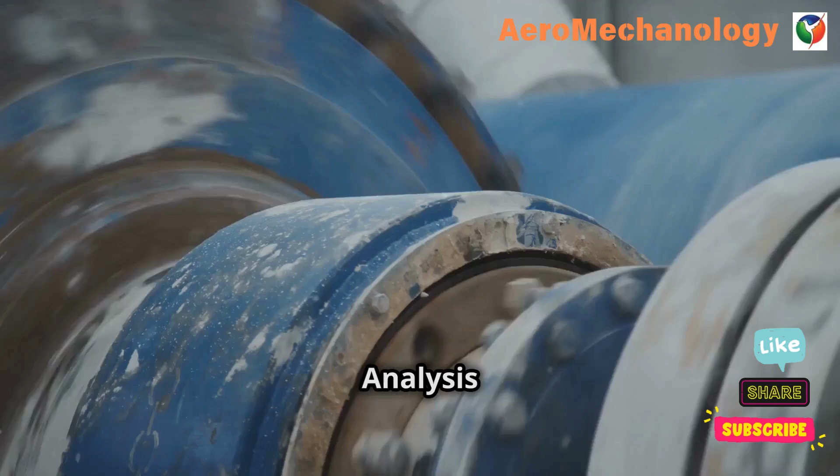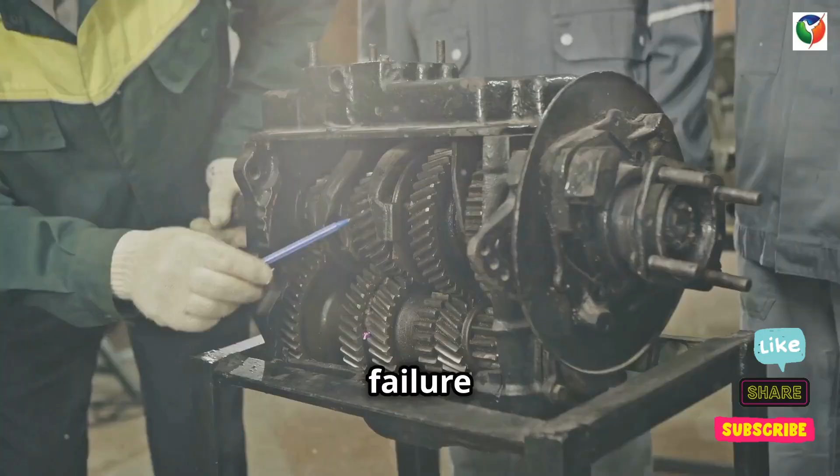Today's topic is fatigue analysis. Fatigue analysis is a critical process in mechanical engineering that evaluates how a material or structure will withstand cyclic loading over time, specifically predicting when failure might occur due to repeated stress or strain.

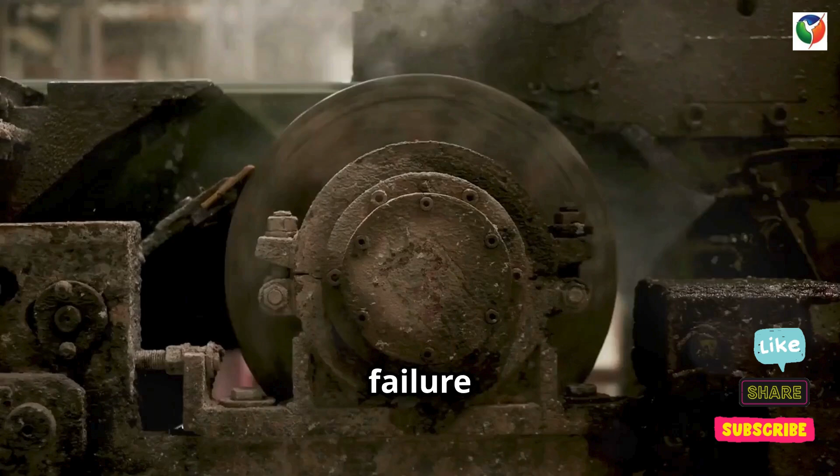Unlike static failure, which is caused by a single load event, fatigue failure happens gradually and can lead to catastrophic failure after many cycles of load, even if the loads are below the material's ultimate tensile strength.

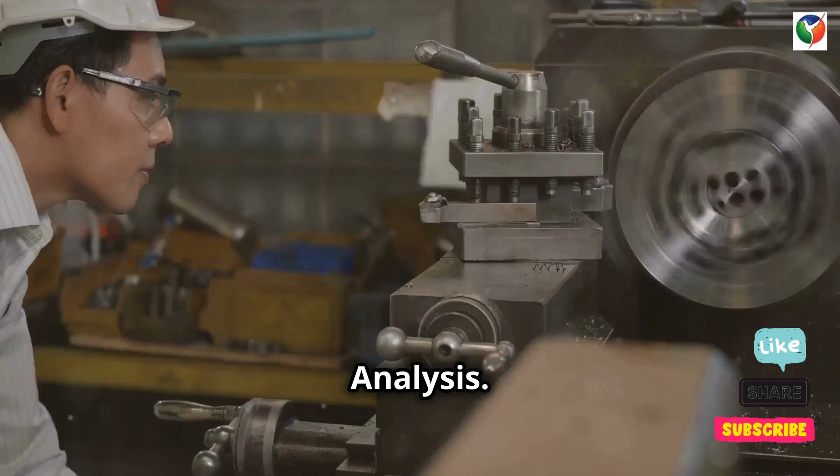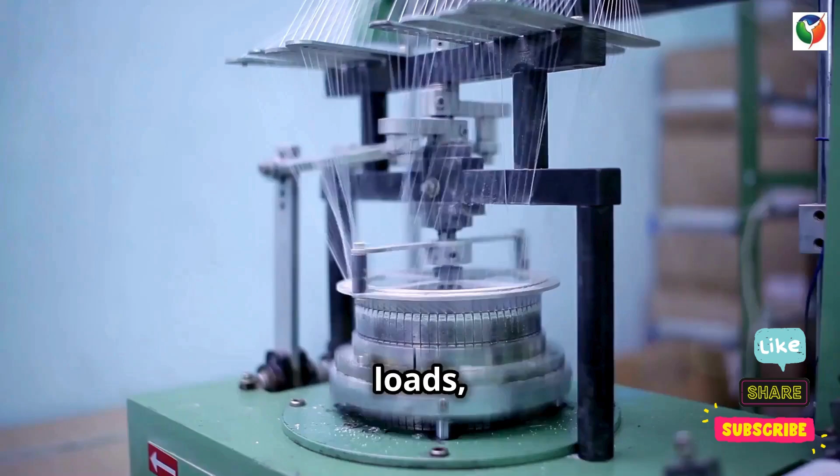Definition of fatigue analysis. Fatigue analysis aims to predict how long a material or component can endure fluctuating or cyclic loads, the number of cycles a material can handle before cracks start to form, and the conditions under which these cracks propagate and eventually cause failure.

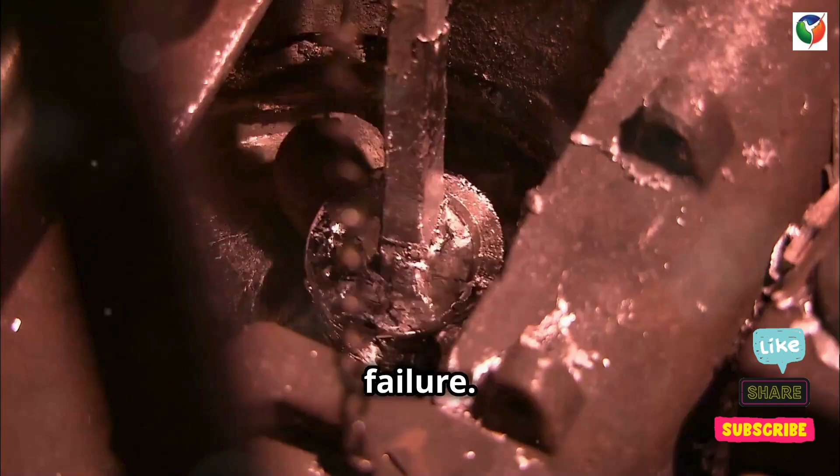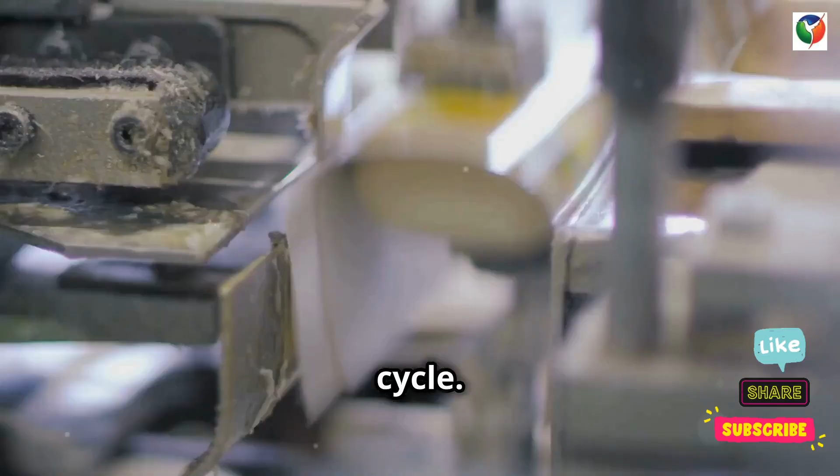Fatigue occurs in three primary stages. Crack initiation, where microcracks form at stress concentrations like notches, holes, or sharp edges. Crack propagation, where these small cracks grow with each load cycle. And finally, final failure, where the crack reaches a critical size, leading to sudden fracture.

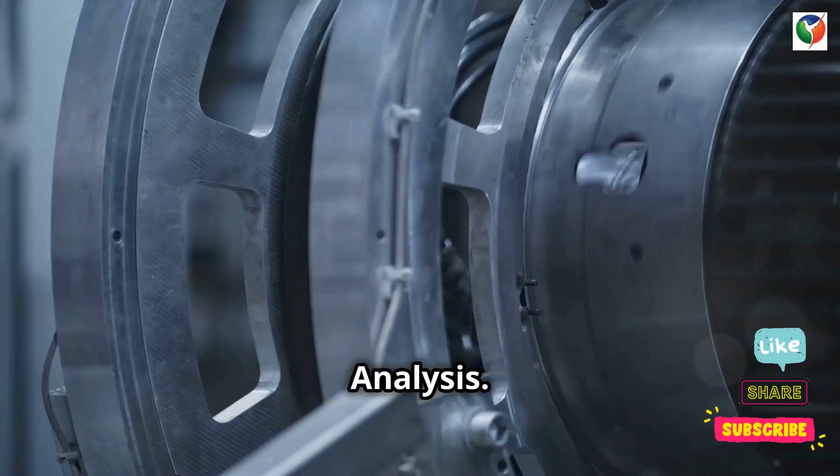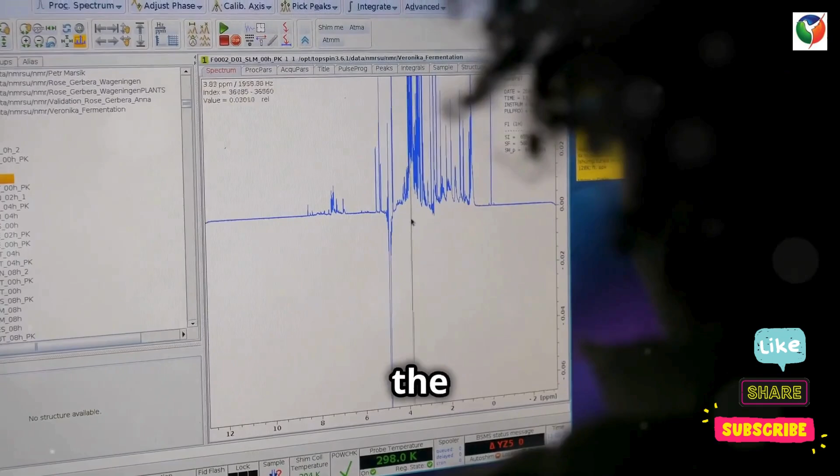Key concepts in fatigue analysis. Stress cycles are load fluctuations that occur over time, usually characterized by their amplitude, frequency, and mean stress. The S-N curve or Wöhler curve is a graph showing the relationship between stress, S, and the number of cycles to failure, N. Lower stress levels allow for more cycles before failure.

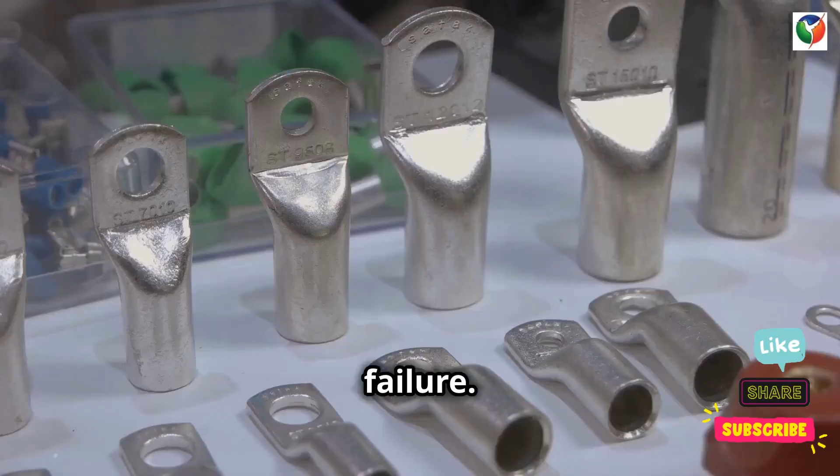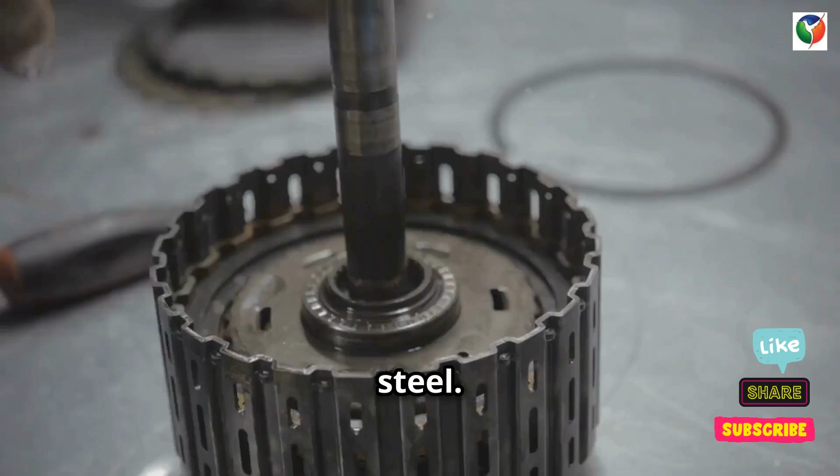The endurance limit is the stress level below which a material theoretically will not fail, regardless of the number of cycles, which is applicable for ferrous metals like steel. Lastly, the fatigue limit is the highest stress level a material can withstand for an infinite number of cycles without failure.

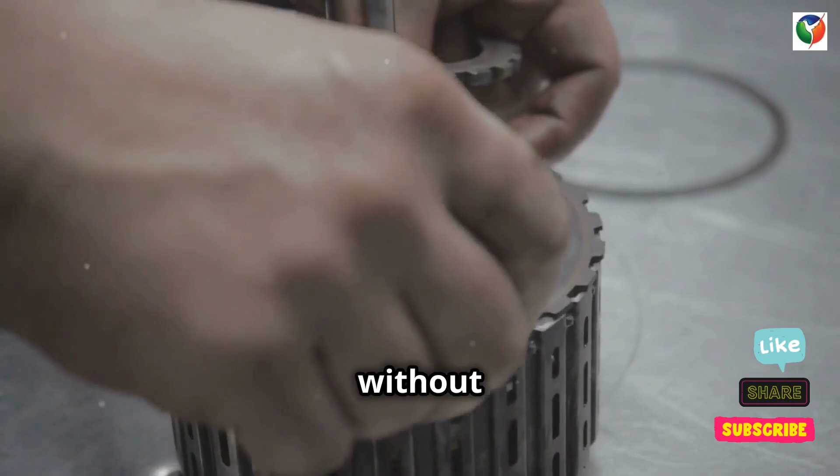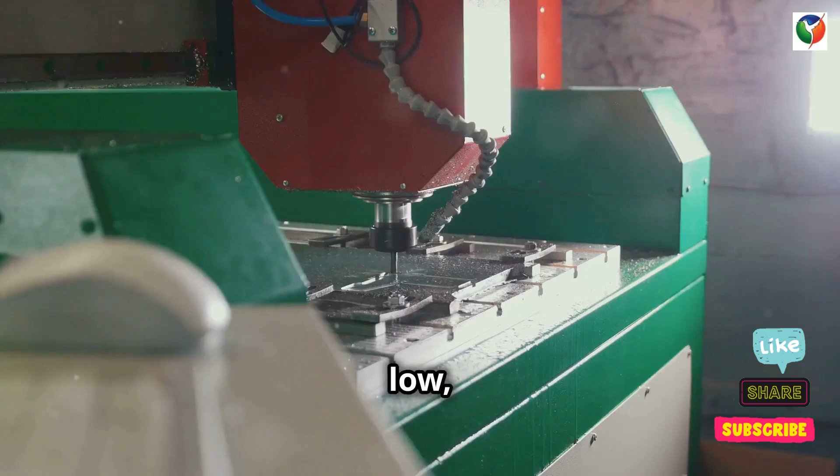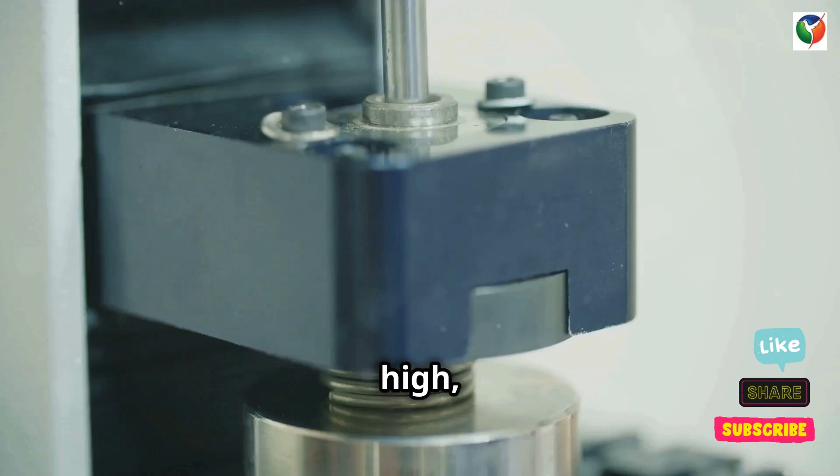Types of fatigue loading. High cycle fatigue, or HCF, occurs when the loads are low, but the number of cycles is very high, often reaching millions of cycles. On the other hand, low cycle fatigue, or LCF, happens when loads are high and the material undergoes plastic deformation, leading to failure in fewer cycles.

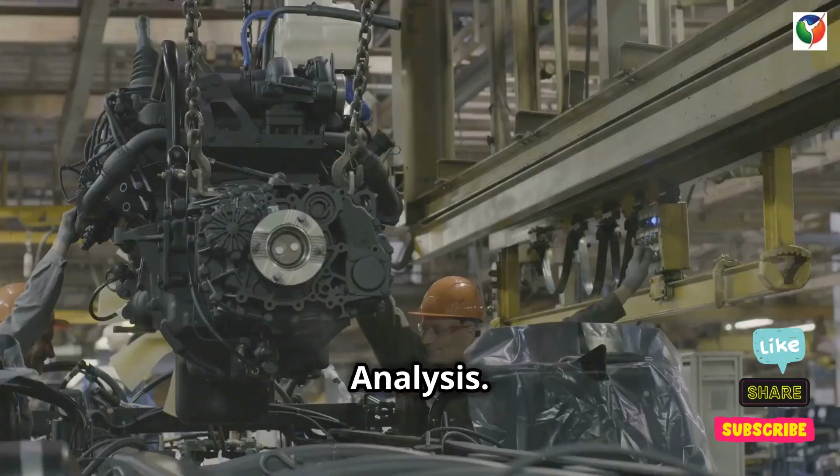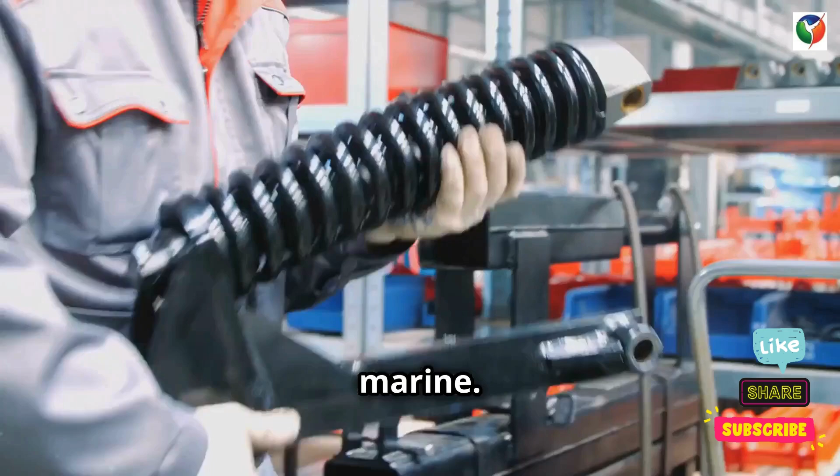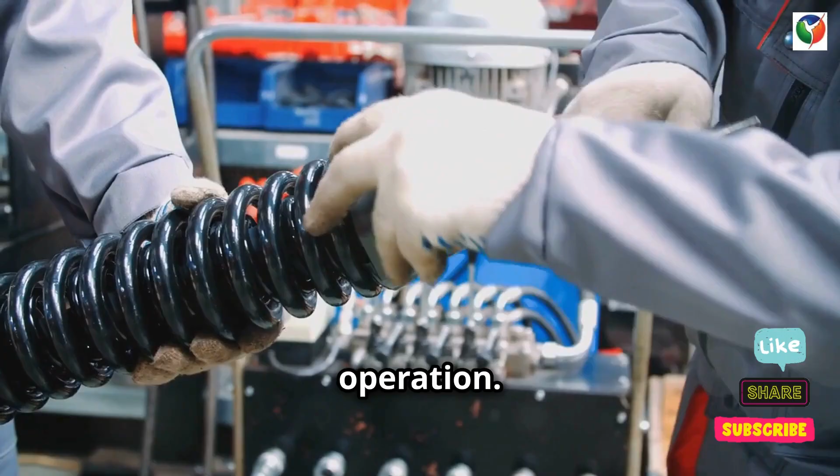Application of fatigue analysis. Fatigue analysis is crucial in industries where components are subjected to repetitive loading, including automotive, aerospace, civil engineering, and marine. In the automotive industry, parts like suspension systems, crankshafts, and engine components are subjected to repetitive stress during normal operation. In aerospace, aircraft wings, fuselage, and engine components undergo cyclic stresses due to changes in pressure and temperature during flight.

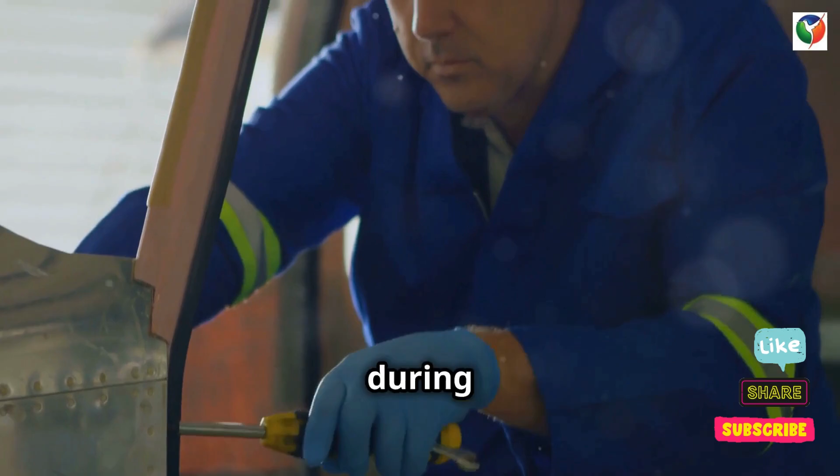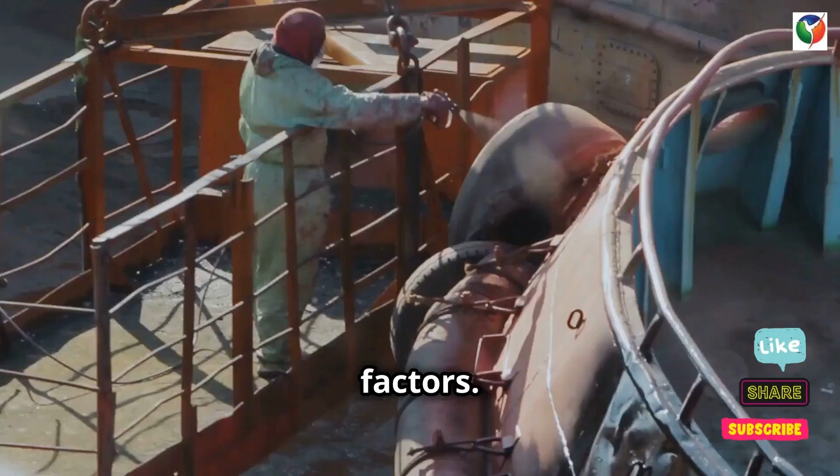Civil engineering structures, such as bridges, cranes, and buildings, experience fluctuating loads from vehicles, wind, or environmental factors. Lastly, in the marine industry, ship hulls and offshore structures, like oil rigs, face cyclic loads from waves and operational conditions.

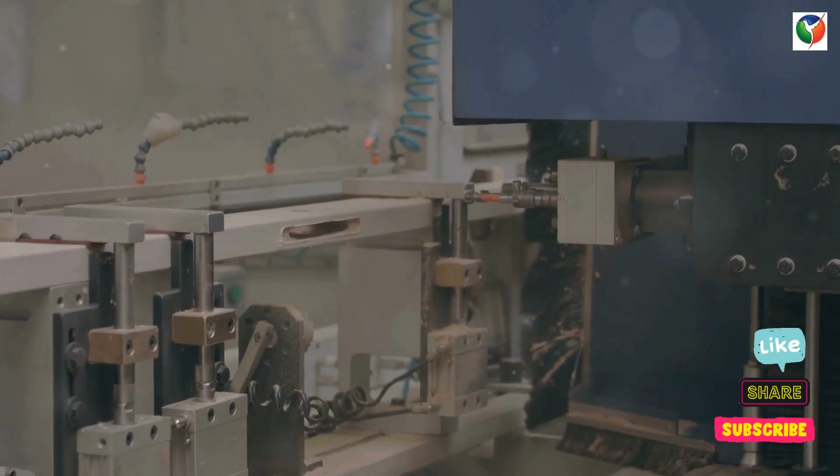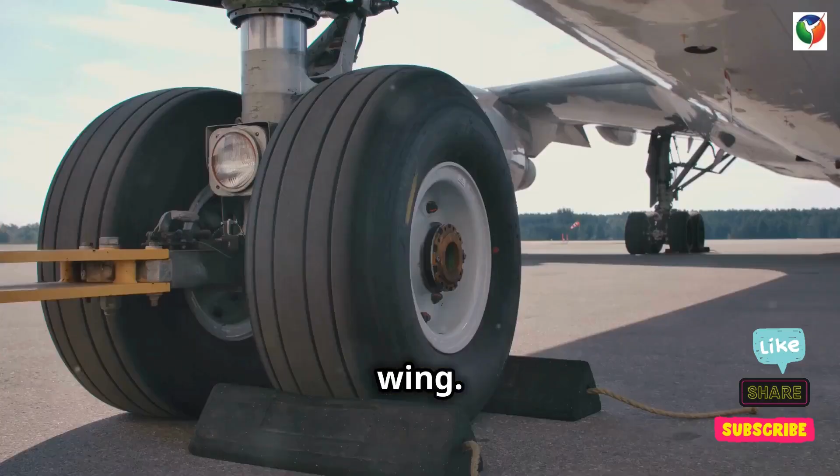Example of fatigue analysis. Imagine an aircraft wing that experiences varying loads during flight due to turbulence, which causes fluctuating lift forces on the wing. Takeoff and landing also introduce high stress as the aircraft gains or loses altitude. The fatigue analysis of the wing would involve several key factors.

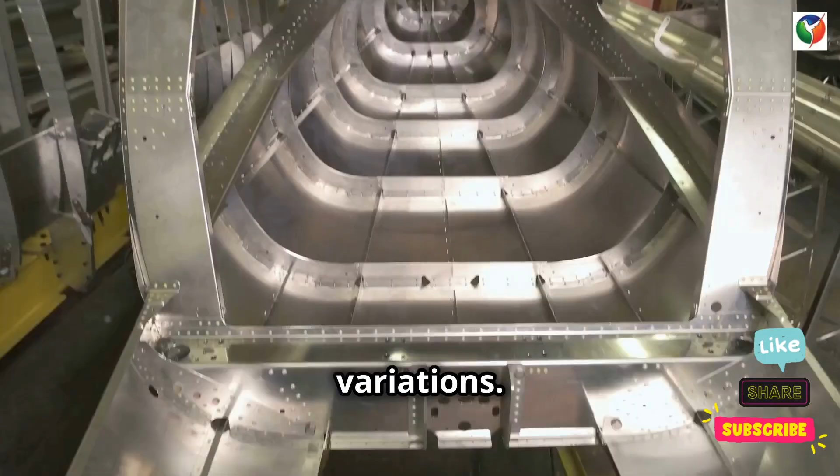First, material selection. Aluminum alloys, commonly used for wings, are tested for their fatigue strength. Next, loading conditions. Analyzing how many cycles or flights the wing can safely endure under expected load variations. Stress concentration areas are particularly important. Attention is given to joints, rivet holes, or welds where stress concentrations occur, as these areas are prone to crack initiation.

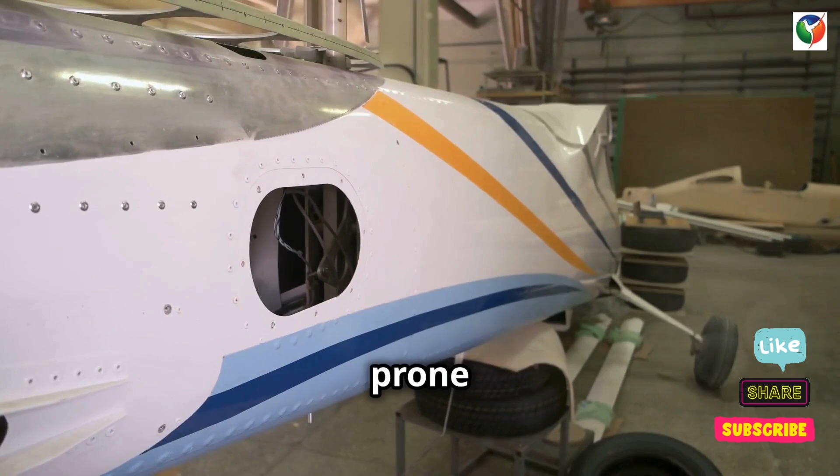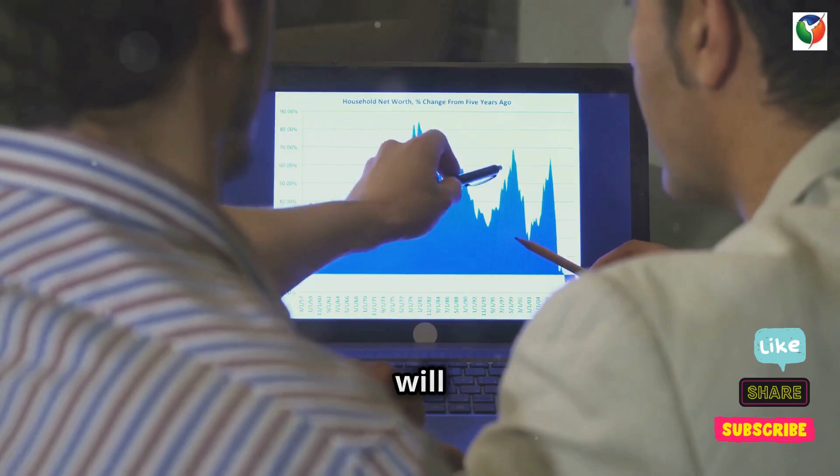The S-N curve for the chosen aluminum alloy helps engineers predict how long the wing will last before cracks begin to form. If analysis shows that cracks could form after 100,000 flights, preventive maintenance schedules are created to inspect and repair potential crack sites before failure.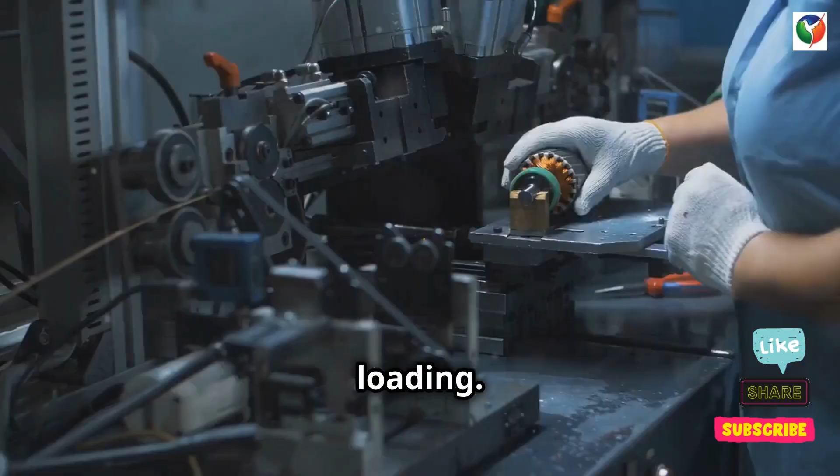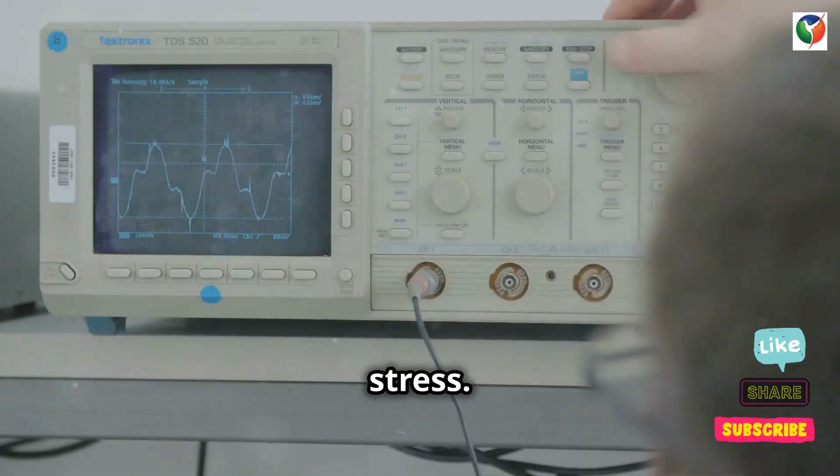Key steps in fatigue analysis. Fatigue analysis involves several key steps to assess whether a part can safely withstand cyclic loading. First, define loading conditions. Identify the cyclic loads, such as mechanical stress, vibrations, and thermal cycles. Consider the amplitude, frequency, and mean stress. Second, material selection and testing. Select materials based on their fatigue properties and conduct tests to generate S-N curves for the material under expected load conditions.

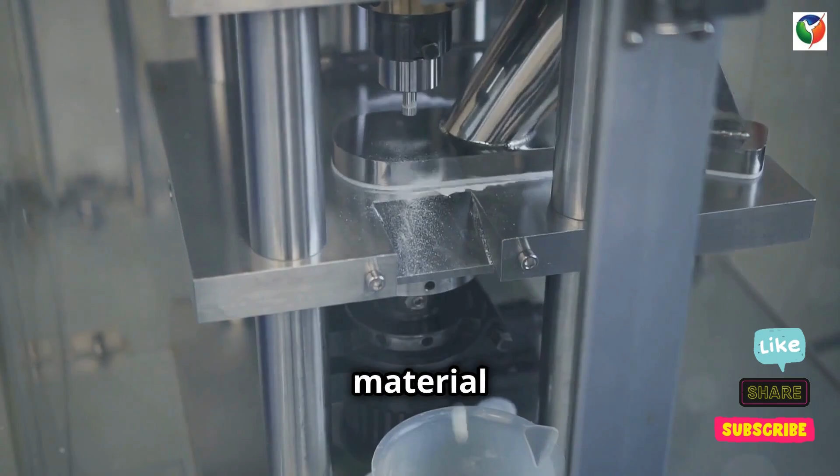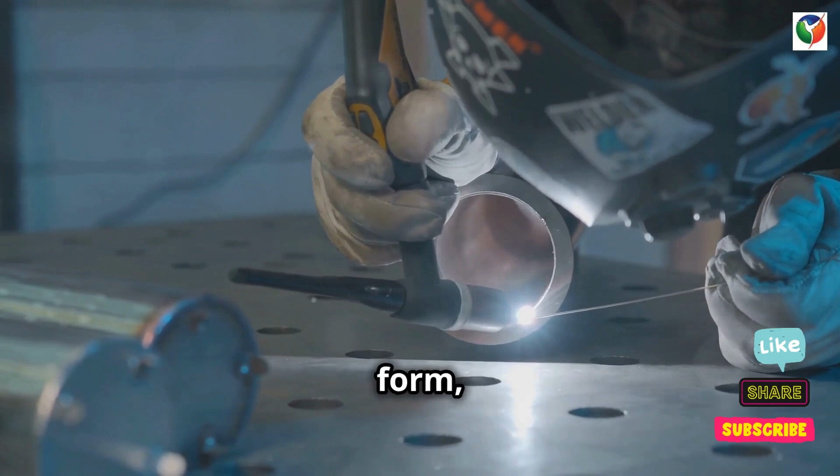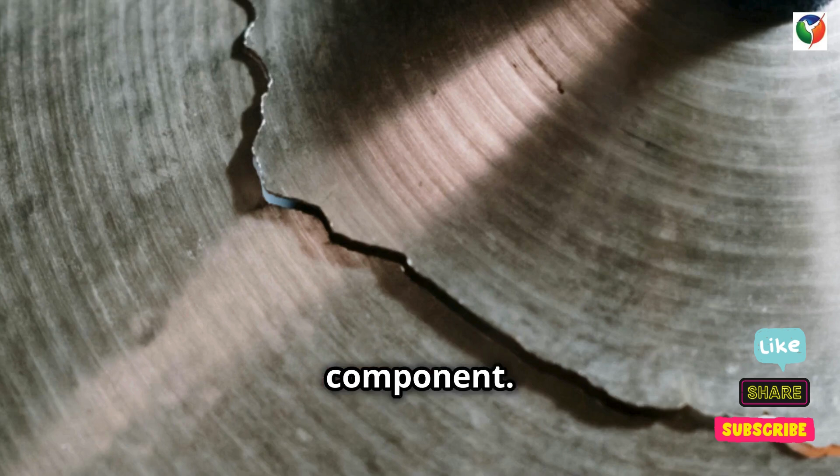Third, identify critical locations. Focus on stress concentration points where fatigue cracks are likely to form, such as sharp edges, holes, and welded joints. Use finite element analysis, or FEA, to predict stress distribution across the component. Fourth, crack initiation and propagation analysis. Estimate the number of cycles to crack initiation using the S-N curve or strain-life approach. Use fracture mechanics to predict how cracks will grow once they are initiated.

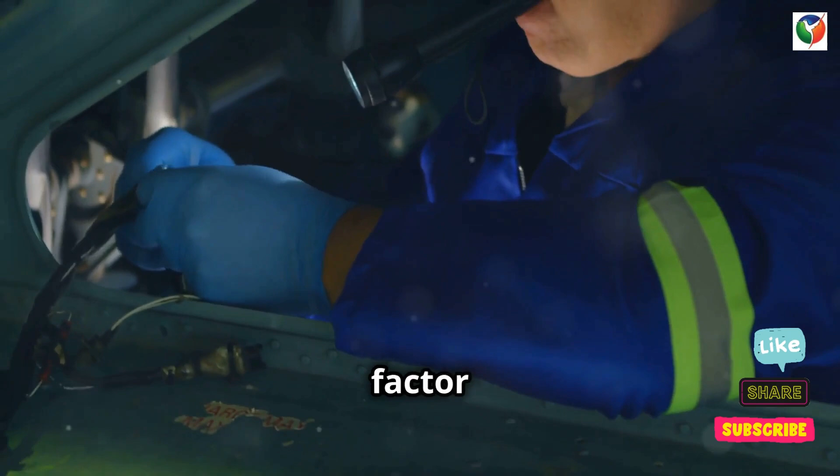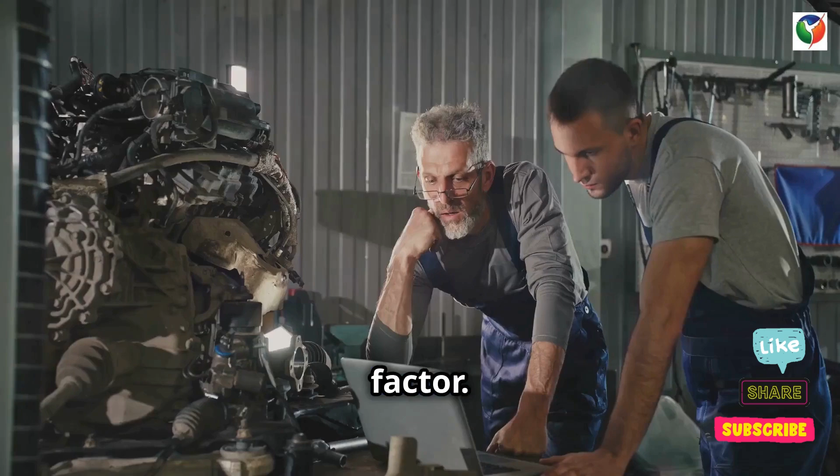Finally, safety factor and life prediction. Apply a safety factor based on the criticality of the part, with aircraft parts requiring a very high safety factor. Estimate the component's life under given load conditions and determine when inspections or replacements are needed.

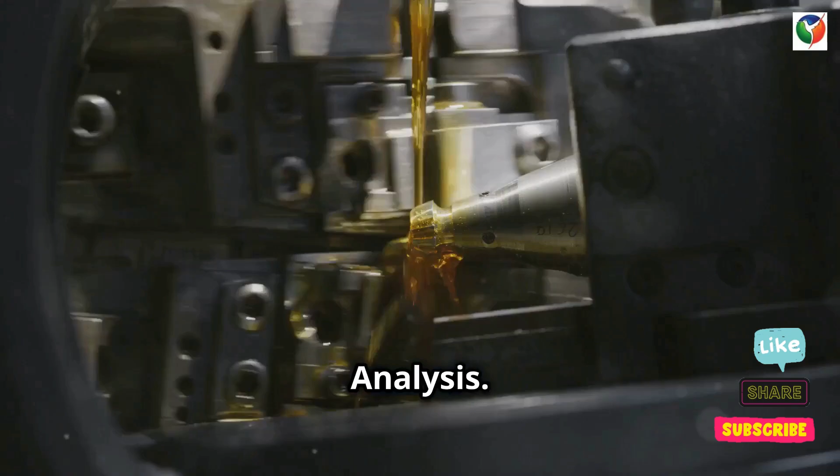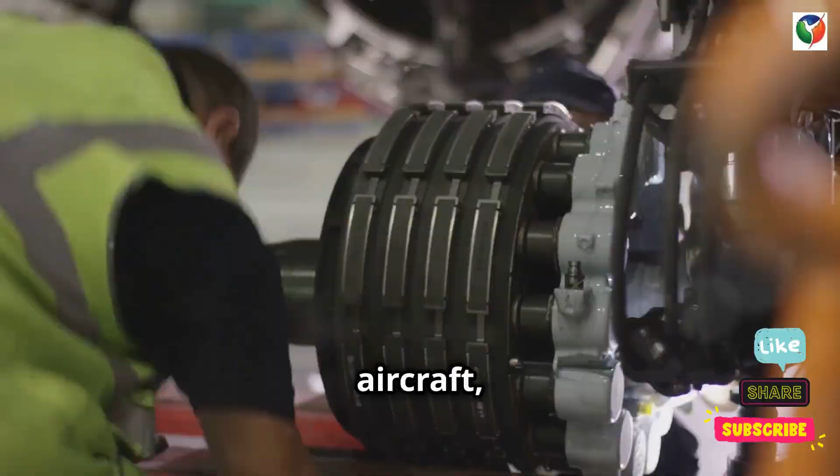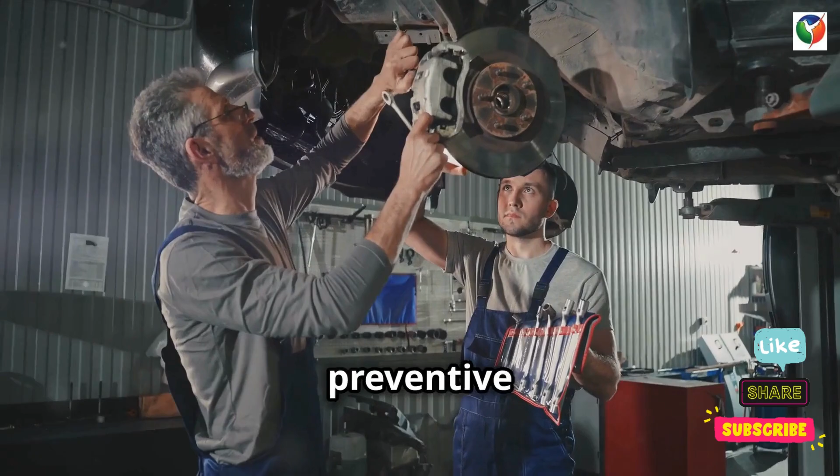Benefits of fatigue analysis. Fatigue analysis prevents unexpected failures by allowing for the prediction of when a component might fail under cyclic loading. It enhances safety by ensuring parts in critical systems like aircraft, automobiles, and bridges remain operational within safe limits. It also optimizes maintenance schedules, allowing for preventive maintenance to be planned based on the expected fatigue life of the component. Additionally, it reduces costs by preventing costly repairs and downtime through early identification of potential fatigue failures.

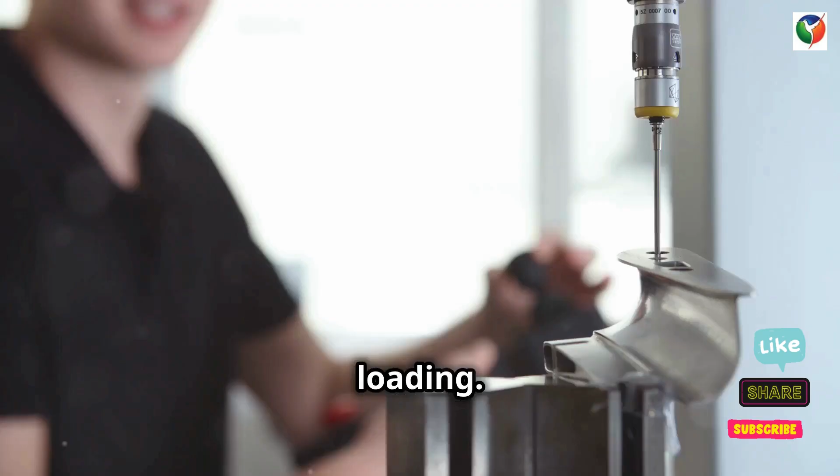Fatigue analysis is essential in ensuring the longevity and safety of components subjected to cyclic loading. It helps engineers design parts that can withstand repeated stresses without failure and allows for the optimization of materials and maintenance practices across industries. From automotive and aerospace to civil and marine engineering, fatigue analysis is a cornerstone of safe and efficient design.